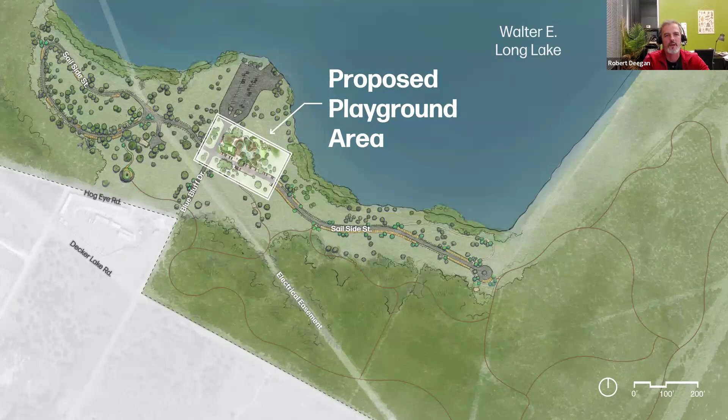So we're going to be talking about two areas of our playground tonight. There's an area we're calling the traditional play area, and that area is meant to embrace many of the ideas of all-inclusive play. And then there's an area that we're calling the nature play area, which has some very specific goals as well.

With the traditional inclusive playground area, what we're trying to do is create a universally inclusive playground that really meets the cognitive, emotional, and physical needs of the very wide range of children that playground is serving. So that may mean physical accessibility.

That may mean having spaces for children to take a cognitive break or to have different types of experiences that fit their mood. It also can mean, especially for able-bodied children, still providing those very high levels of challenge within that playground that keep those children engaged as well.

And doing all that in a way that allows children of all different abilities to interact within that playground and to use the same equipment and to cooperate on the same equipment.

It's also very important to remember caregivers when we talk about inclusive play. Many times it is caregivers who have mobility limitations, and we want to make sure that they also have access to be able to assist the children they're there with in using the play equipment.

Nature play is, I think, a really important concept that the Parks Department has really been embracing. And there's going to be a designated area within this playground for nature play. Nature play, again, is still included to accommodate the full range of ages and abilities that'll be using this playground.

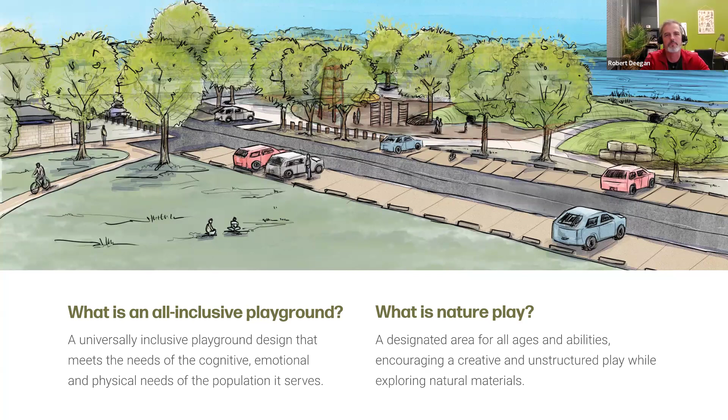So that's kind of the basic idea of nature play, and we'll be showing you in each of our concepts how we've implemented both of those ideas. Next slide.

So I'm going to hand this presentation over to Edith from my team to walk you through each of these concepts in more detail. And then I'll be back towards the end of this presentation to ask you some detailed questions about your opinions on this. Thank you, Robert.

So I'm going to go ahead and get started with the first option, the Hills and Valleys Playground. This design integrates the site's natural topography, exaggerating it a little by pushing the play area further down the hill, incorporating existing trees for natural shade, shown in this area right here.

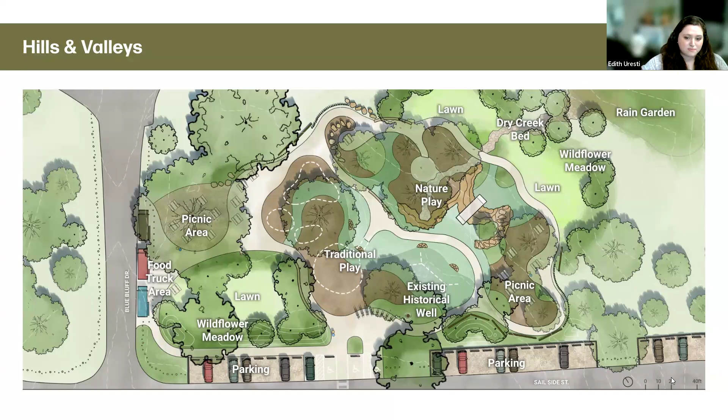Here is a section of the Hills and Valleys option. As shown, this option would incorporate the topography into the play areas, making it adventurous, but also accessible, using bridges and elevating it, introducing multiple play levels.

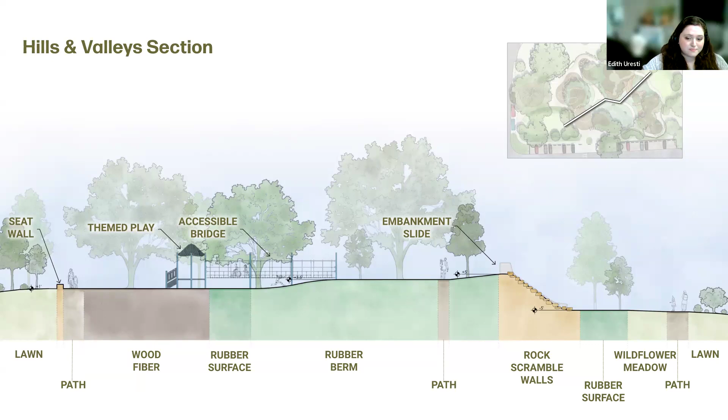On one side of the berm, a themed play tower area will feature a large slide, climbing elements, and interactive zones with tactile and musical play, as you can see in the middle row of photos. At the base of the berm, there's a swing set and some stone nooks that will allow children to hide and play while remaining visible to parents and caregivers, as shown in the bottom two left photos.

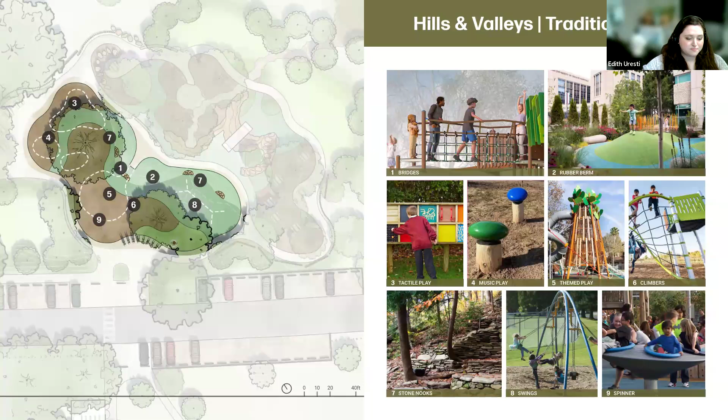Now the second option, the lakeside hideout. This design is located on a flatter part of the site. It's closer to Blue Bluff Drive, offering easy access to the food truck area and picnic spaces, but it's also closer to traffic with less existing shade.

To address the lack of existing shade, we're proposing large semi-mature trees that will be planted within the play area. The main entrance to the playground will be on the south side.

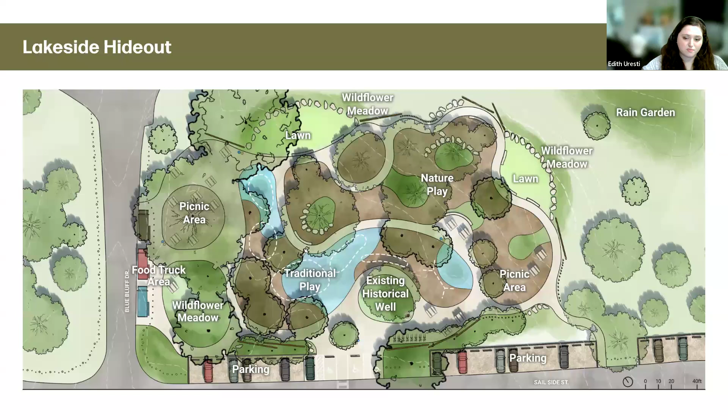This section shows the lakeside hideout version, and as you can see in this option, there are no major changes in topography. It stays on the more level part of the site, slightly sloping towards the lake.

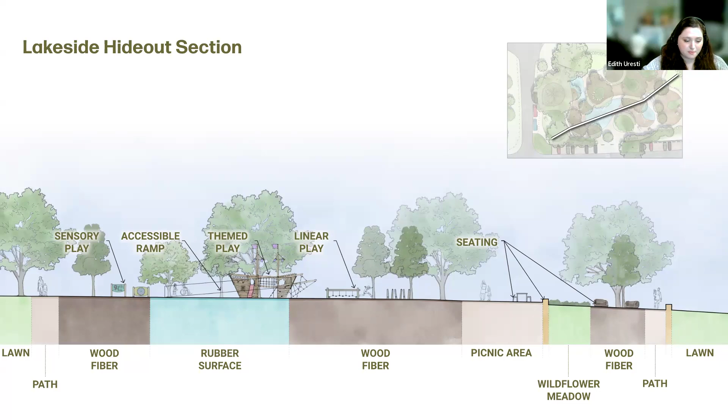New trees will be planted in this area to add natural shade. These are all images of proposed designs, but this space can be whatever we want.

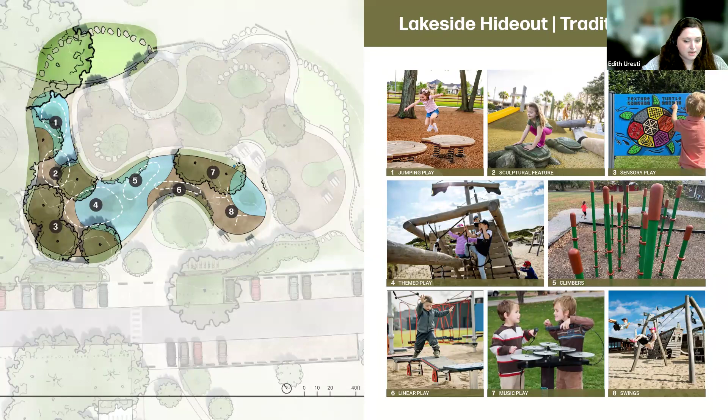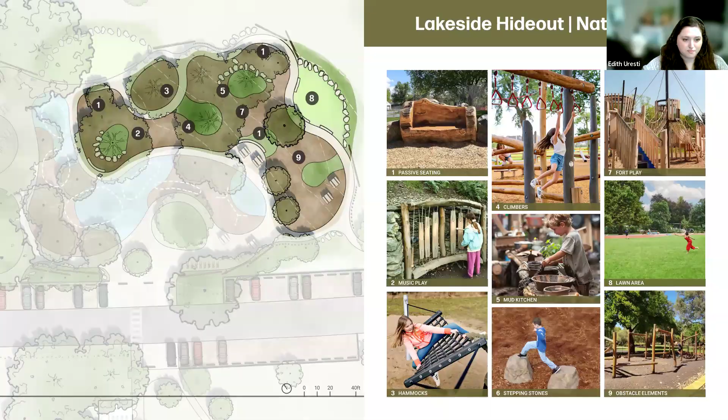We're going to ask you a couple of questions here. The first question is going to be a general question about which concept you prefer, but I want to walk you through the questions that are going to follow before we actually conduct the survey. So the first question will be: overall, do you prefer Hills and Valleys or Lakeside Hideout? Here, I want you to really pay attention, or at least to a large degree, on how the project lays out and integrates with the site, more so than how it integrates thematic elements, because the next three questions are going to be about thematic elements.

So really think about: do you like the integration of topography to create interest and dynamism in the site, or do you like to see the site a little more flattened out to create better accessibility and visibility? Do we like pushing the playground further down the hill where it's farther from food trucks, maybe farther from traffic, and better integrated with existing shade? Or do we like pulling it up the hill to take advantage of the open space, where we have fewer impacts on existing trees and still take some advantage of existing shade in both concepts? Those are the kinds of questions you can ask yourself, in addition to how the playground lays out and what its overall character is.

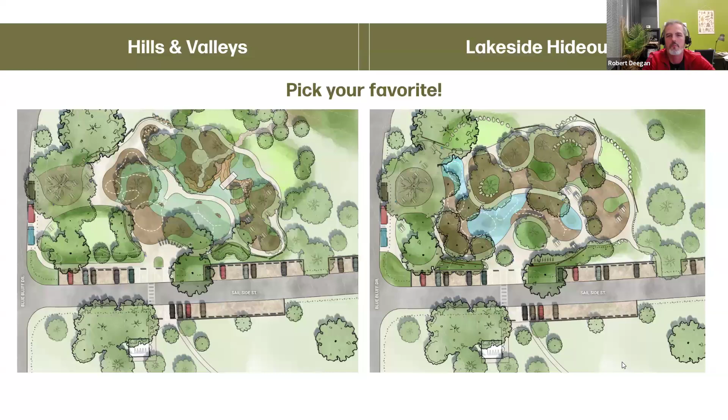The next question is playground themes again. You're going to be asked to rate each of these themes from 1, the most appropriate, meaning you like it the best, to 3, the least appropriate, meaning you like it the least, at least for this specific project. You don't have to rate them 1, 2, and 3 — you can rate them all 3 if you think they all stink, or all 1 if you love them all. You can do 1, 1, and 2, 3s, whatever reflects how you feel about what's appropriate for this specific park and project.

There's one more question. If we can move away from the timeline and trails, there's a question about a splash pad or water feature. I just wanted to point out there's a mud kitchen in the second concept. There are no plans for a splash pad at this time. I didn't know if Rialto wanted to add anything—that's correct, we're not planning a splash pad at this site, at least in this phase, and I think it's outside the scope and budget of what we're contemplating at this point.

And finally, will you be sharing the renderings? Would love to share them with the survey that goes out. This meeting is being recorded, the presentation will be on the webpage, and the recording of this meeting will be on the webpage, as will the link to the survey. Because the survey is typically done by people on their mobile, we can't put a ton of images on the online survey, but we will have links within the survey pointing to the images online. I hope that answers the question understandably.

And then what are the next steps from here until construction? I'll start by saying we're launching the survey. It will be live for a month, and then we will be doing pop-ups throughout that time to engage people. This is the largest metropolitan park in Austin, a park for all of Austin. It's a beautiful place, and we want as many people as possible to know about this phase 1 improvement project and try to get as many people to weigh in on these lovely concepts that Rialto has done for us.